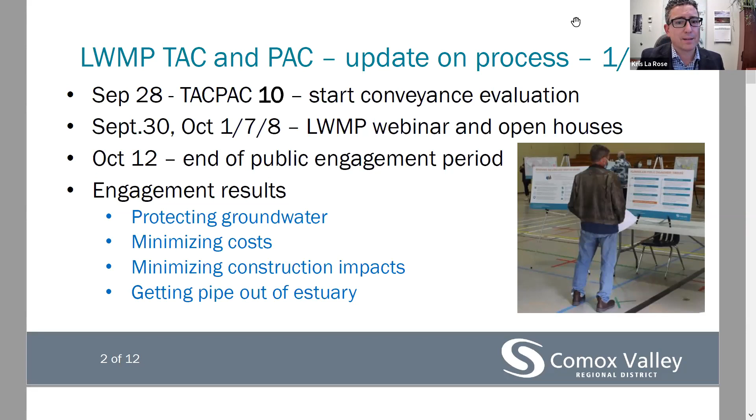So on October 27th, it was TACPAC 11, so that was the second of the pair of TACPAC meetings that were intended to evaluate and select the conveyance solution. So the results of that day of discussion was that the first option was eliminated. It was fairly far behind in points, but options 2 and 3 tied. As I mentioned earlier, they are quite similar, but there are some significant differences.

Option 2 would see the entire force main replaced with an overland force main, and option 3 would see the portion between Courtenay and Comox retained until the end of its life, and then the remaining portion replaced immediately. So just at a high level, option 1 was penalized for being the most expensive and the highest risk. As I mentioned, that one would involve pumping up and over the full height of land.

Option 2 was almost as expensive as option 1, but had a lower risk, so scored better. Option 3 had the least impacts to taxpayers, so scored well from that perspective, but had some elevated risk from continuing to use the foreshore pipe. At the end of the day, for options 2 and 3, those key factors effectively balance each other out, and they were tied.

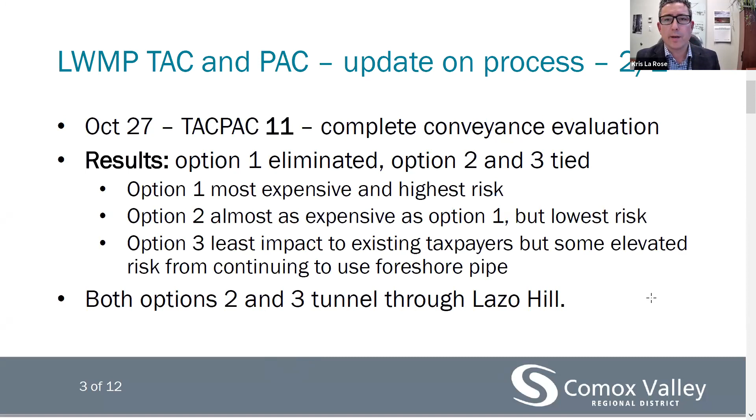So as a result, staff are tasked with developing a recommendation based on the outcome of the TACPAC process and the public feedback that has been received, and then putting all of that information in front of the Sewage Commission, which we hope to do in early December of this year for that decision. Just the last point there, to highlight that both options 2 and 3 look exactly the same to residents of the Lazo Hill area. The next slide, please.

So there were some questions in advance of the meeting regarding the lack of a map highlighting the approximate alignment of a tunneled pipe through the Lazo Hill area. And I have to apologize for that. We were quite focused on construction impacts, and the map that explained options 2 and 3 did show the alignment for option 3 running along Lazo Road, when in reality, as this map shows, the exit pit for the tunnel would be at the intersection of Balmoral and Torrence, and the entry pit would be about halfway down Moreland Road.

There's actually one more thing on this slide. The technology selected for tunneling through Lazo Hill, if that option is selected, and it certainly looks that way now that option 1 has been removed, is horizontal directional drilling. I'll get into the details of how that works on a subsequent slide, but something to note here on this slide is that yellow line laid down along Balmoral.

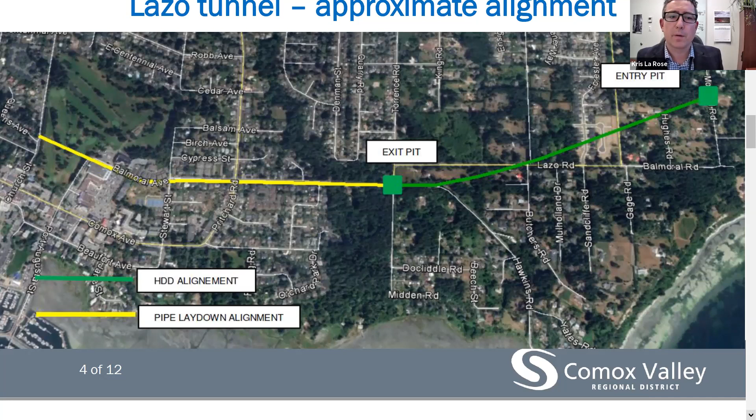So just something to keep in mind is that part of the horizontal directional drilling process is creating a hole and assembling a pipe, and in this case, that would be laid down along Balmoral Avenue with some significant construction impacts to the town of Comox. It takes about 2 months to assemble that pipe while the hole is being created, and then that entire assembled pipe would be drawn through the hill, thereby connecting the entry and exit pit with an installed pipe. So next slide, please.

So horizontal directional drilling, which we refer to as HDD, involves drilling a pilot hole along an alignment, from an entry pit to an exit pit. I just saw a question pop up about what is an entry pit and what is an exit pit. The entry pit would be where the drill rig is set up. Instead of a well drilling setup pointing straight down, this is a similar setup, but at an angle pointing in the direction that the tunnel will run, and then that drill rig is able to steer the drill bit, follow a precise alignment that's worked out in detail in advance, and surface at the exit pit.

So the first step is to drill a pilot hole along that alignment, and then the next step would be to pull progressively larger drill bits, they're called mandrels, to gradually enlarge that hole through progressive passes back and forth along that pilot hole until they've reached the desired diameter.

Throughout that process, a slurry, almost a smoothie-consistency material composed of bentonite clay, so a very slippery mixture of clay and water, would be pumped through that hole, and that accomplishes three things primarily. It provides some lubrication for the drilling process. It removes the excavated material, because as the drill bit is pushed through that hole, it's creating debris which gets suspended in the slurry. The slurry is pumped to either end and then processed through a treatment plant.

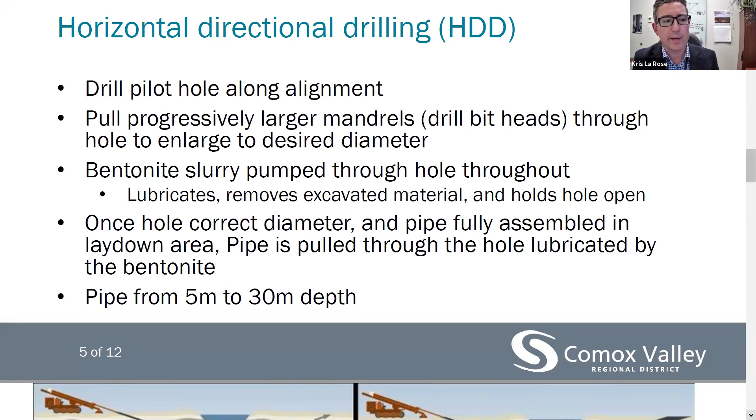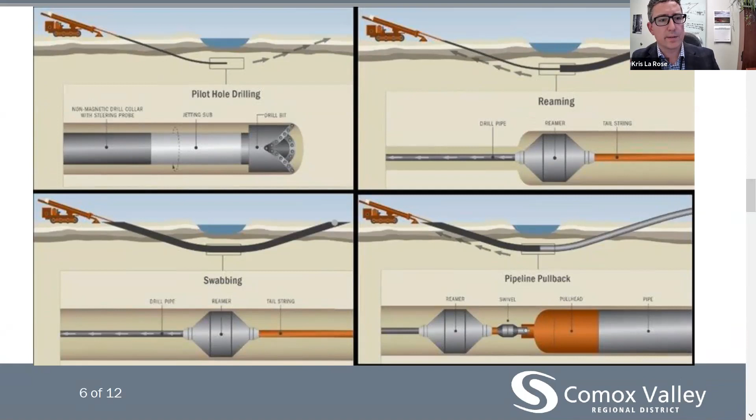This is just a diagram graphically illustrating what I just described. So on the top left, the drilling of the pilot hole, you can see the drill bit on the front there is intended to take the first pass. It eats away at the full width of that pilot hole. And at the very top, you can see the drill rig. In this case, they're going under a river. In our case, we'll be going under a hill.

So push through to the exit pit, pull the reamer back through. And what it doesn't show here is that for a hole of this diameter, it would take multiple passes, and they'll have multiple diameters of reamers. And then finally, the bottom right, the final reamer is attached to a special fitting on the front of that assembled pipe and drawn through the hill.

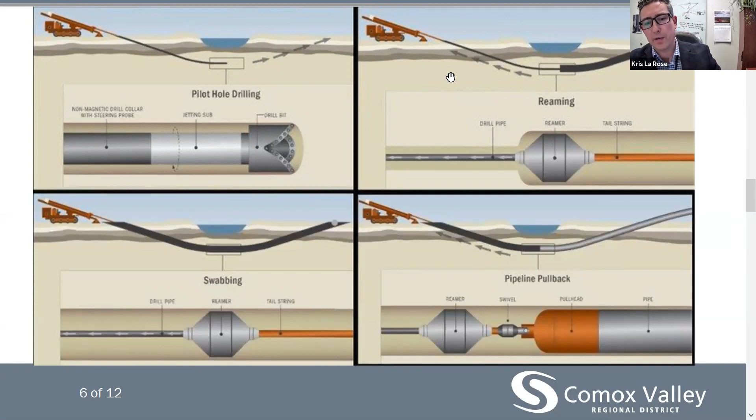So a question that has come up is, clearly with this option, it does not follow the road right-of-way. Although there are sections of road right-of-way that it crosses, the majority would fall under private landowners. And so there were questions about what that process would look like.

So on our end, what we're planning is that after the Sewage Commission decision is made, if they support the direction that involves tunneling under Lazo Hill, we'll be reaching out to property owners along the tunneled alignment to initiate discussions to work towards establishing a statutory right-of-way. The alignment that's laid out on the screen here is not set in stone. There is some flexibility, some room for shifting north and south to a limited extent.

In terms of a statutory right-of-way, most people might be familiar with a typical SRW, which is used for surface pipes. Some of you may have SRWs on your property already. For pipes that are installed through trench and cover, it's common to have a restriction on putting fences or structures over top of that alignment, to avoid potential damage to the pipe underneath. Often they'll have language around restricting the growth of trees, that type of thing. A tunneled alignment SRW is quite different, given that the pipe is so far below the surface.

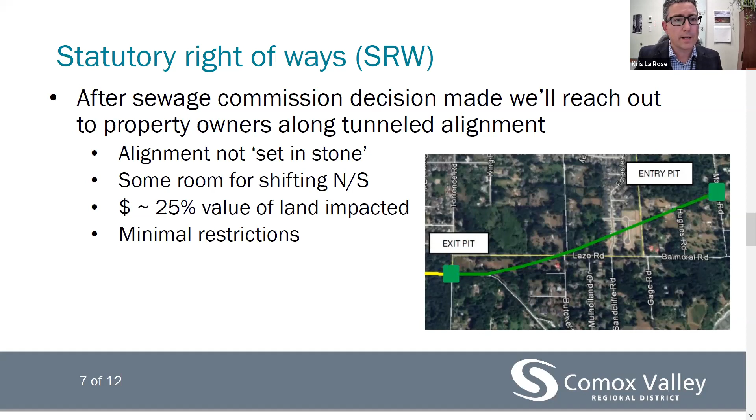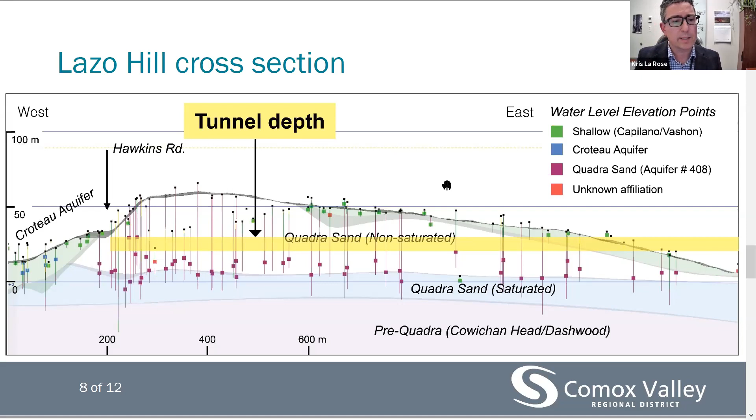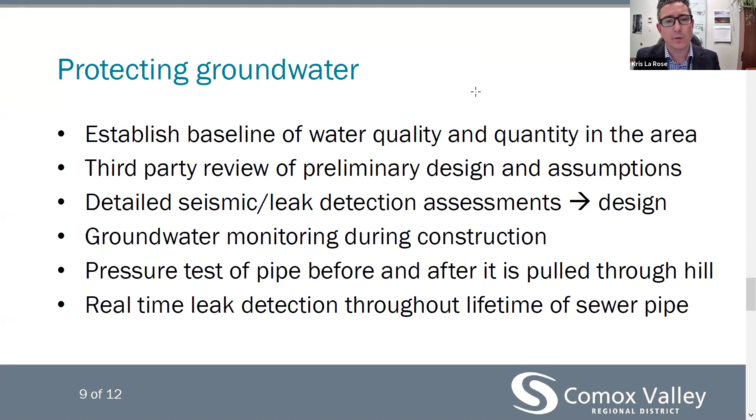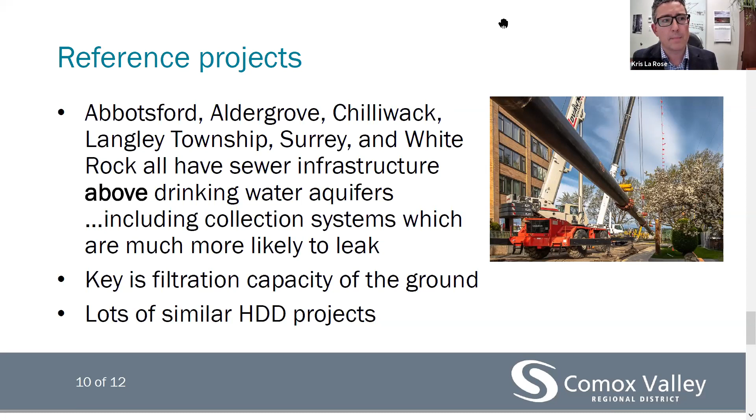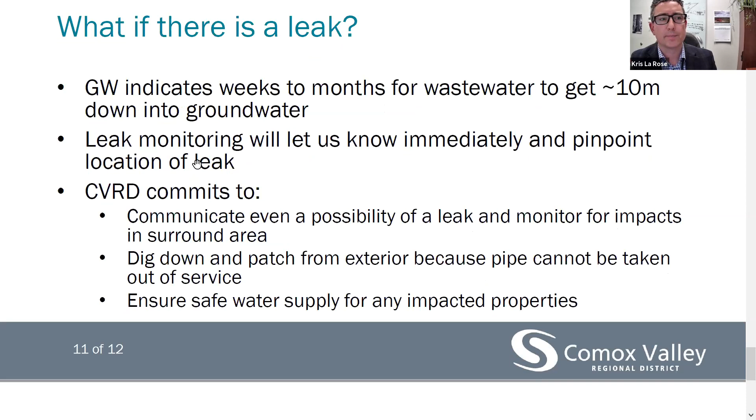So that's it from me. And I'll pass it over to Marcy to moderate the questions. Wonderful. Thank you, Kris. We went through a lot of the topics that have been emailed in, a lot of the questions, and I'm going to loop back to some of the first questions that came in. Kris, I'll let you pass things to Gilles if it's appropriate.

So one of the early questions was, let's get a quick one out of the way. It was about entry and exit pits. If you can just tell us how big those are typically in size. Sure. So for example, the exit pit at Balmoral and Torrence would be expected to be located in one lane, 1.5 lanes of that road. So that would be the approximate width, and about twice that in length.